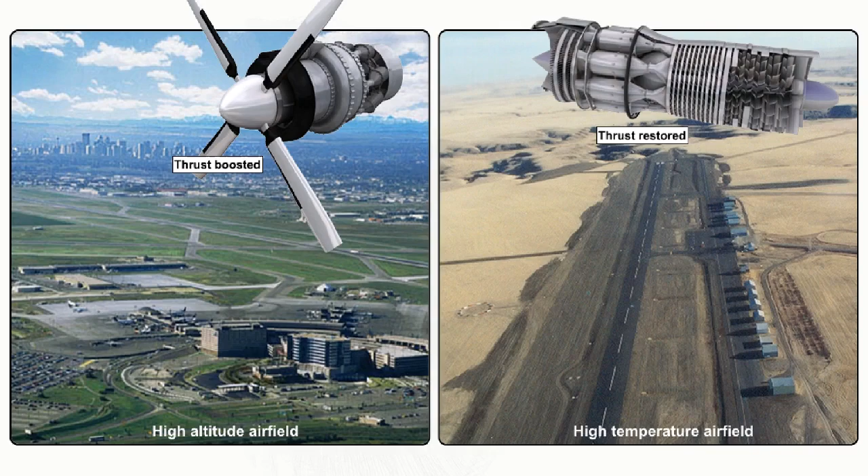In conditions of high altitude and/or high ambient temperature, the use of a water injection system can restore the thrust of a turbojet engine and boost the output of a turbopropeller engine. Typically, the water injection system is activated by moving the throttle to the takeoff position.

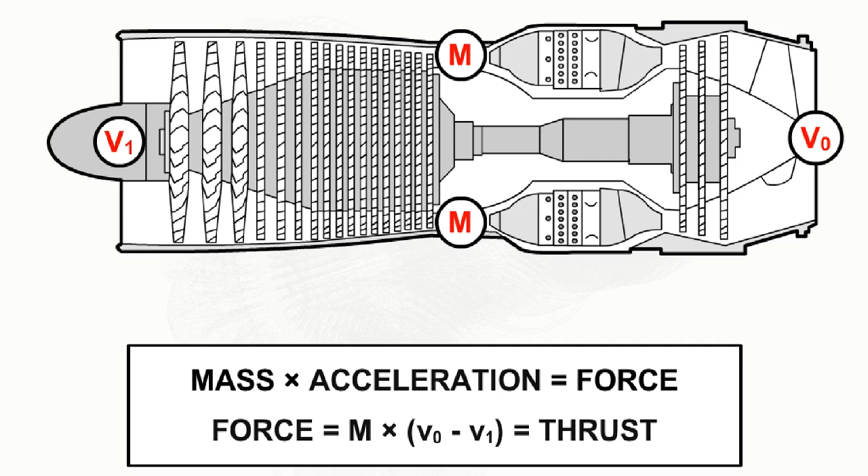We stated in the introductory lesson that the power output of a gas turbine engine depends upon the mass of air flowing through it and the acceleration imparted upon that mass of air. In conditions of high altitude and/or high ambient temperature, the density of the airflow through the engine, and therefore the mass of that airflow, decreases, causing a reduction of thrust in the case of a turbojet engine, or a reduction of shaft horsepower in the case of the turbopropeller engine.

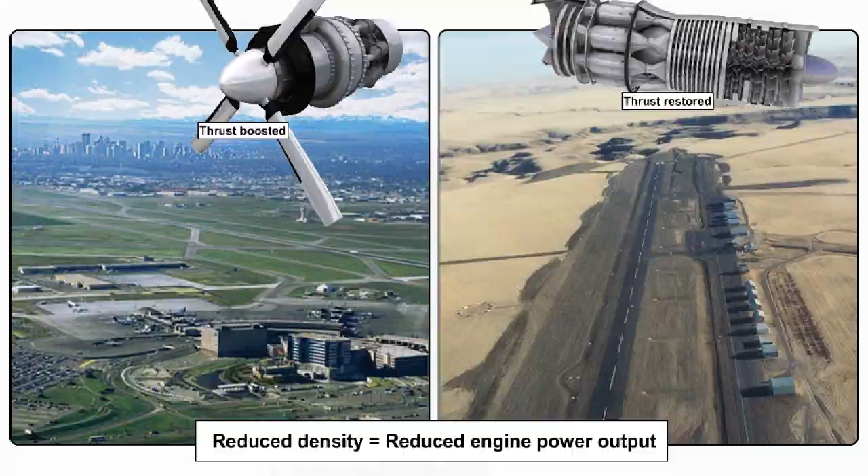To restore, or as is sometimes the case, boost the power output of an engine, the airflow passing through that engine can be cooled by spraying water into it.

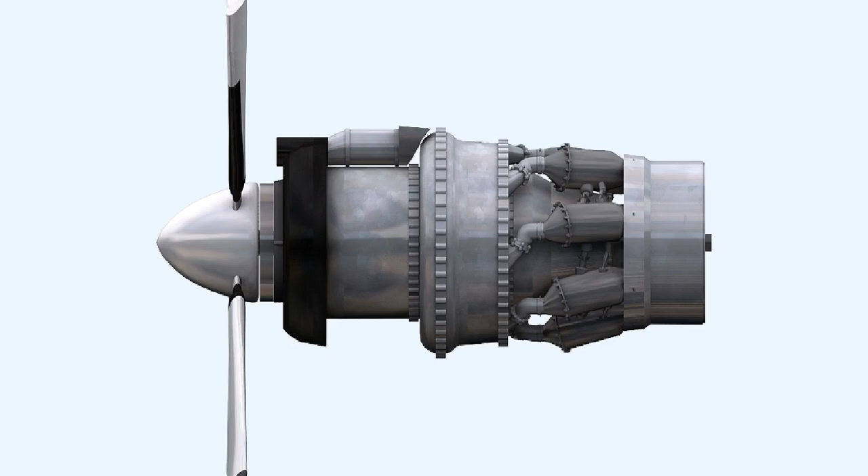The amount of water carried for use in these water injection systems can be large. The Boeing 707 and the DC-8 used to carry approximately 300 gallons of water injection fluid per engine, which all had to be used up during the 3-minute takeoff and climb. This equated to a water flow rate of 100 gallons per minute. The fuel flow through each engine at takeoff was 9,000 pounds per hour, or approximately 22 gallons per minute. This gave a water flow to fuel flow ratio of 4.5 to 1 through the engine during those periods when the water injection was being used.

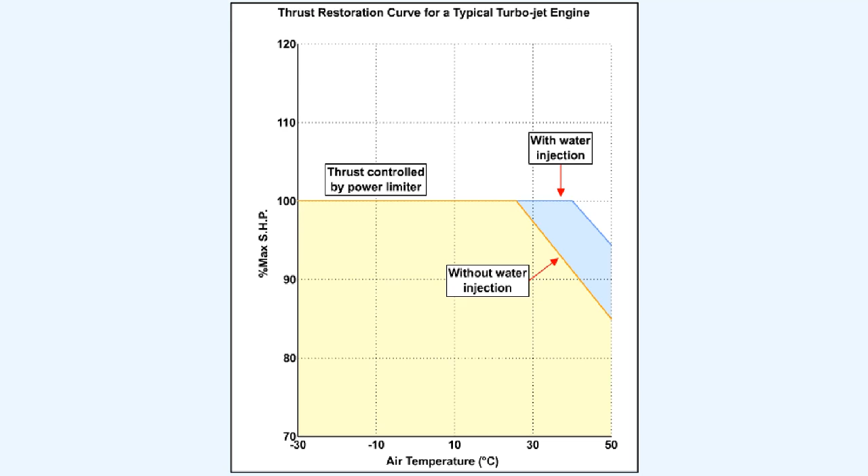Now we can see the power restoration curve for the same engine after a water injection system has been utilized to restore the power available from the engine back to the 100% level. The ability of the power restoration system is, however, limited to only perhaps 25 degrees Celsius above ISA.

The reason for limiting the thrust restoration of the turbojet engine to that of its flat-rated performance is that, although the mass of the airflow could be increased, with relatively few complications, by increasing the compressor speed, the maximum compressor outlet pressure has to be limited to prevent the engine compressor casing splitting under the excessive pressures that would be generated by using such a procedure.

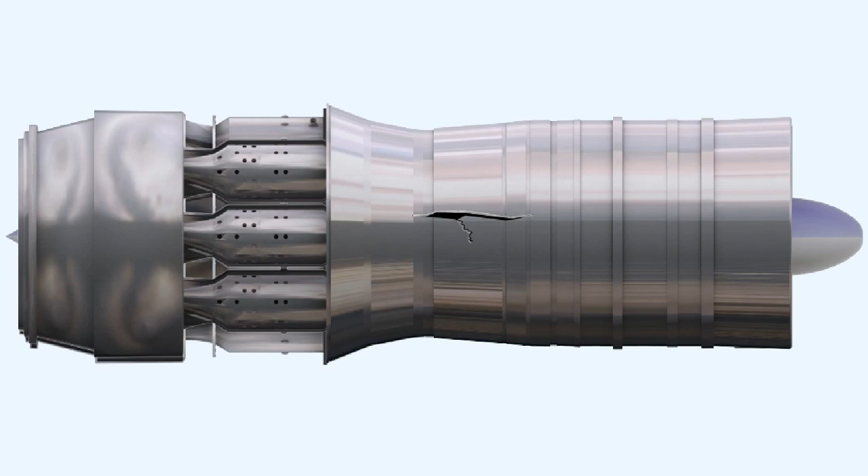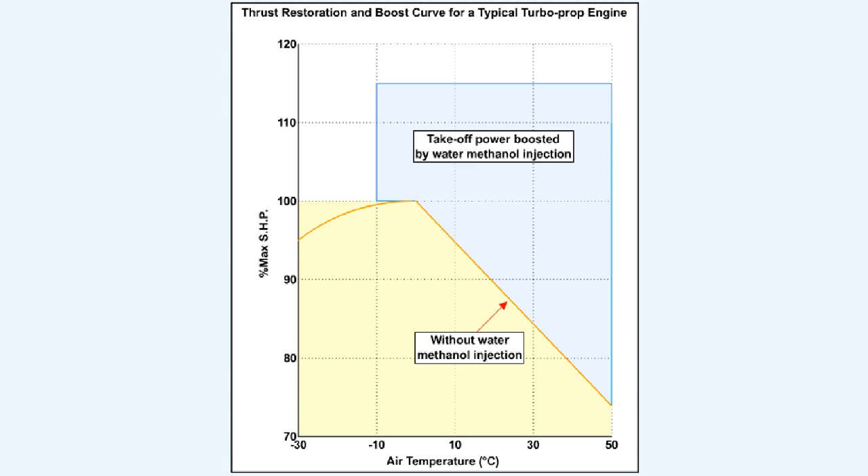This diagram shows the power curve of a typical early design turbopropeller engine without a power augmentation system operating. Now the power output of the same engine has been boosted by 15% by a power augmentation system. Note that in this particular instance the power augmentation uses water methanol as opposed to pure water. More on this fluid later.

In the case of a turbopropeller engine, if the water is injected into the combustion chamber, which is by far the most popular method of water injection, the mass flow through the turbine is increased relative to that flowing through the compressor. In the turbopropeller engine, this increase in the mass flow through the turbine is not used to increase the compressor RPM, and thereby increase compressor output pressure. Instead, the increase in mass flow through the turbine is absorbed by coarsening the pitch of the propeller to increase the mass of air being thrust rearwards, while maintaining the engine rotational speed at no more than the normal maximum.

This procedure very effectively increases the shaft horsepower output of the engine.

Some centrifugal compressor engines, and also some small American-designed axial flow compressor engines, used a system of injecting the water into the engine intake. Unfortunately, the water distribution was not of the best, and also the quantity of water injected had to be limited, so as not to cause an engine flameout.

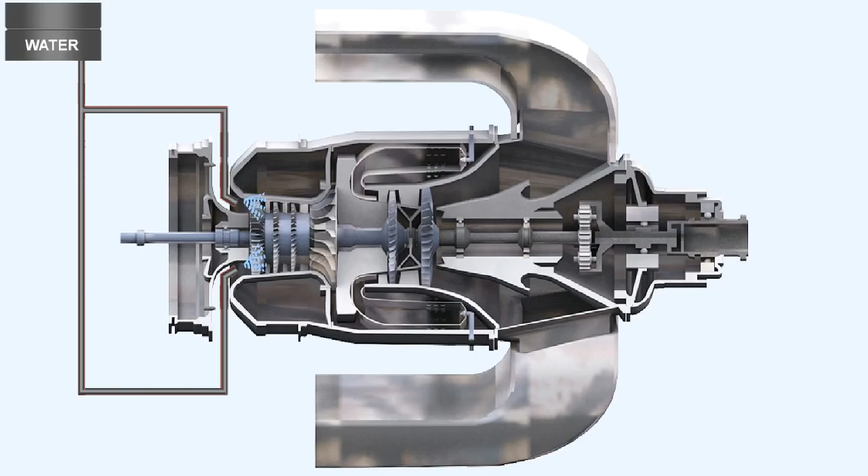As we stated earlier, injection of water into the combustion chamber increases the mass flow through the turbine relative to that through the compressor. Because a comparatively lower level of energy is being extracted from the turbine, even though there is an increased mass flow through it, there is a related decrease in the amount of pressure and temperature dropped across the turbine.

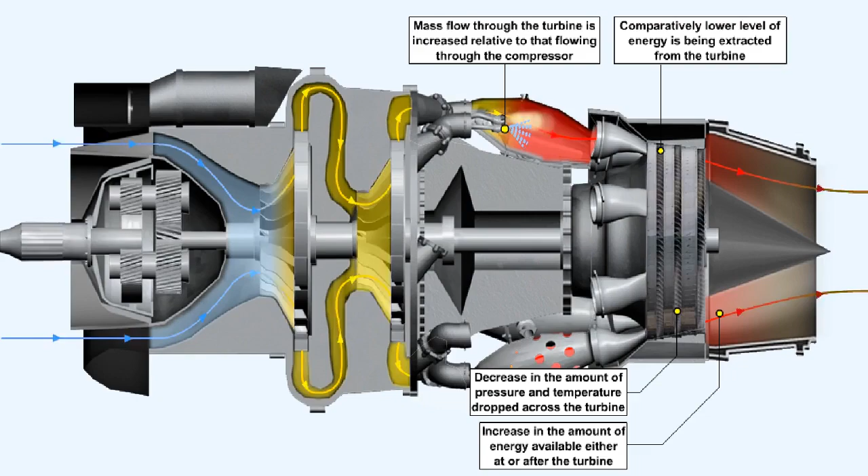This means that there is an increase in the amount of energy available either at or after the turbine. This can be used to generate extra thrust, either by driving the propeller at a coarser pitch, in the case of a turbopropeller engine, or, in the case of a turbojet engine, by increasing the pressure at the propelling nozzle.

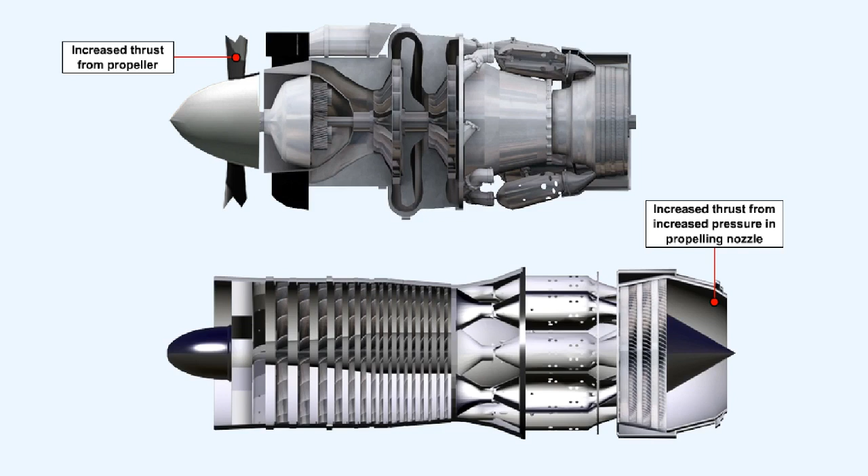A pure water injection system does have some drawbacks, not least because the water must all be used up on takeoff, if it is not to freeze in the tanks as the aircraft climbs to altitude.

It's logical to require an injection fluid that does not freeze. Thus, methanol is added to the water. The methanol serves primarily as an antifreeze.

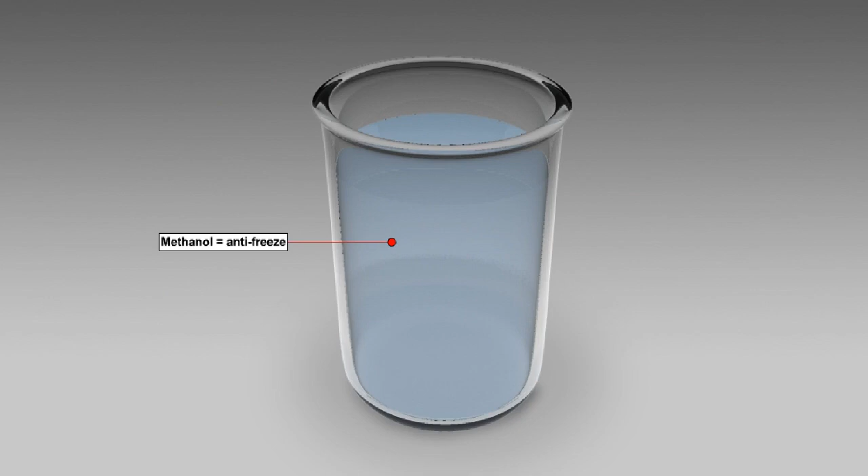By injecting coolant into the combustion chamber, the turbine gas temperature is lowered dramatically. However, if nothing was done to counter this fact, it would lower the amount of power potentially available, because the turbojet is a heat engine, which relies on there being a large temperature drop across its turbine.

The bonus obtained by using methanol is that, because it is an alcohol fuel, it burns, and thus adds to the temperature of the gases, raising the turbine gas temperature back to its original level.

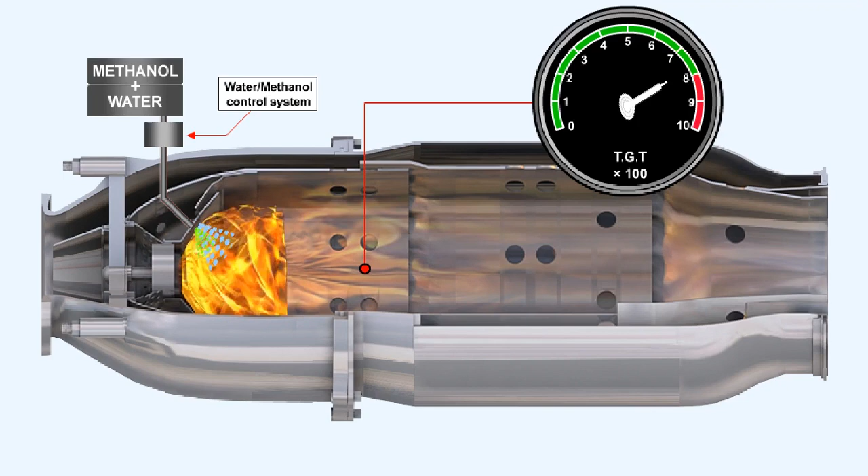In order to regulate the amount of heat added, the quantity of water methanol injected into the engine must be carefully regulated. This is accomplished by a water methanol control system.

The proportion of methanol added to the water must also be carefully controlled. A ratio of 40% methanol to 60% water by volume ensures that the turbine gas temperature limits should never be exceeded during use of the water methanol system.

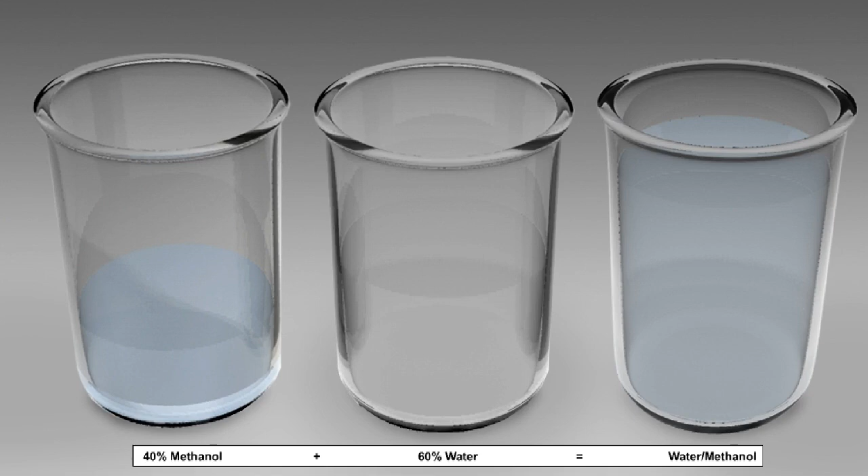Thrust augmentation by afterburning, or as it's sometimes called reheat, makes use of the unburnt oxygen which remains in the engine exhaust gases to release more heat energy.

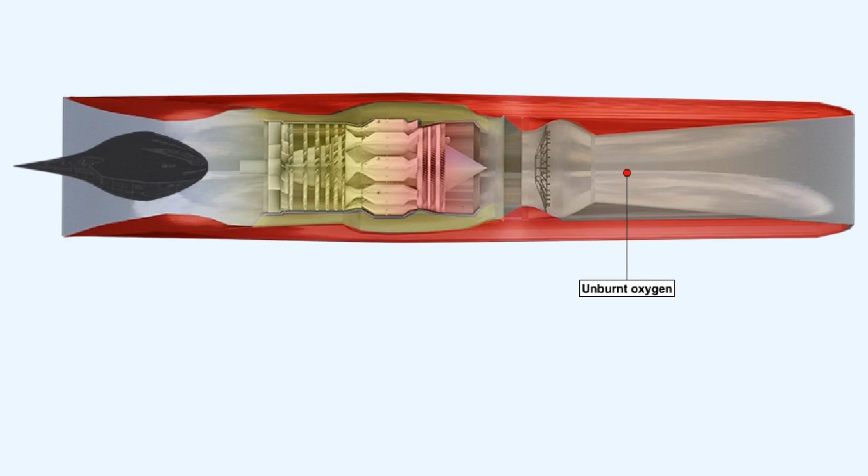This is achieved by injecting fuel somewhere between the turbine and the propelling nozzle and burning it. Afterburning is used to improve takeoff, climb and combat performance. Its use is mainly restricted to military aircraft.

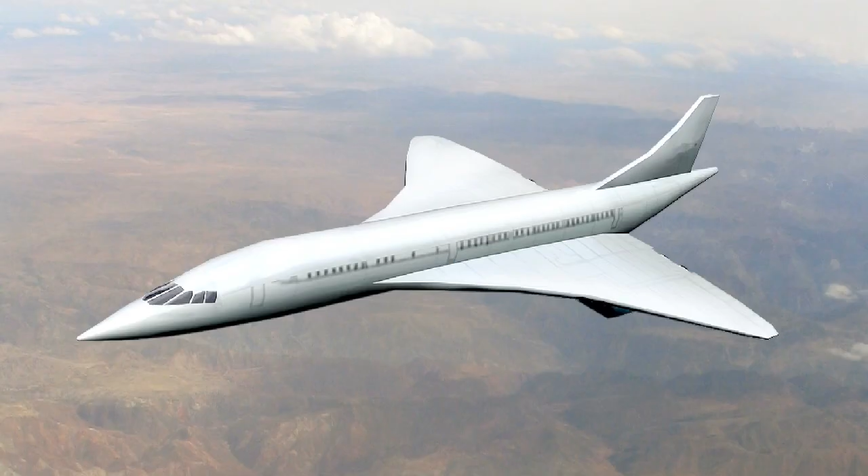Fuel is introduced into the jet pipe through discharge nozzles centrally disposed around the axis of flow. This enables some of the relatively cooler turbine discharge gas to flow along the jet pipe walls, which aids in cooling the jet pipe. This is required because the afterburner flame temperature may be in excess of 1700 degrees Celsius.

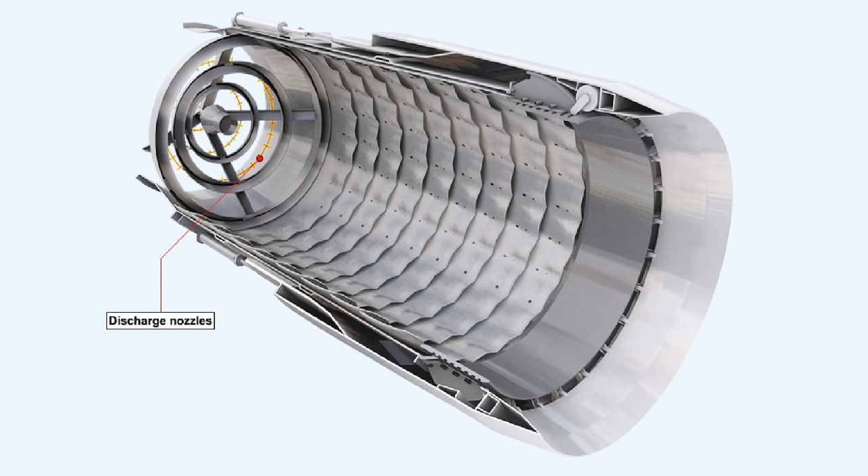An afterburning jet pipe is fitted with a variable area propelling nozzle. The area of the propelling nozzle is restricted during non-afterburning operation, and it's opened fully to allow for the increased volume of gas which is produced during afterburning operation.

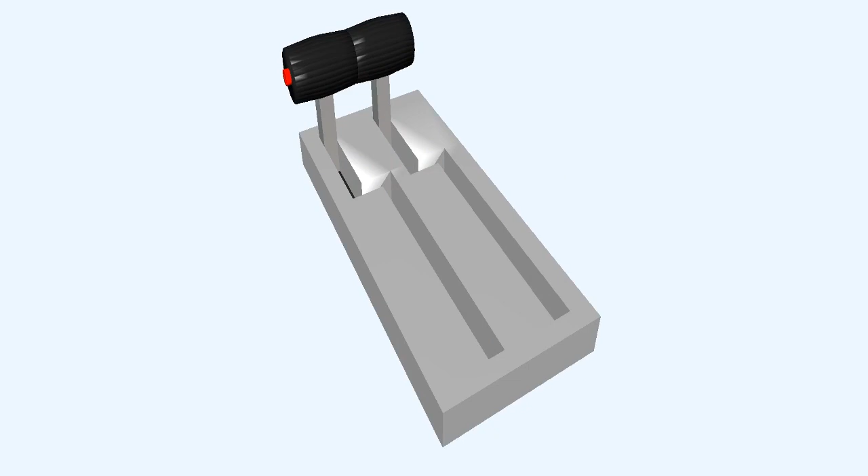The selection of afterburner is usually initiated by the pilot moving the throttle lever through a detent or gate. Control of the nozzle is automatic.

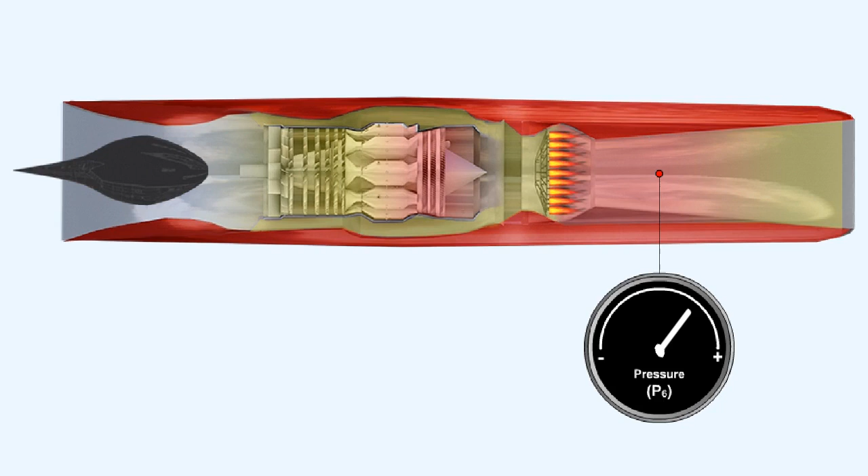When the fuel from the afterburner is ignited, the pressure in the jet pipe, which is called P6 pressure, will increase. This causes a change in the pressure ratio across the turbine.

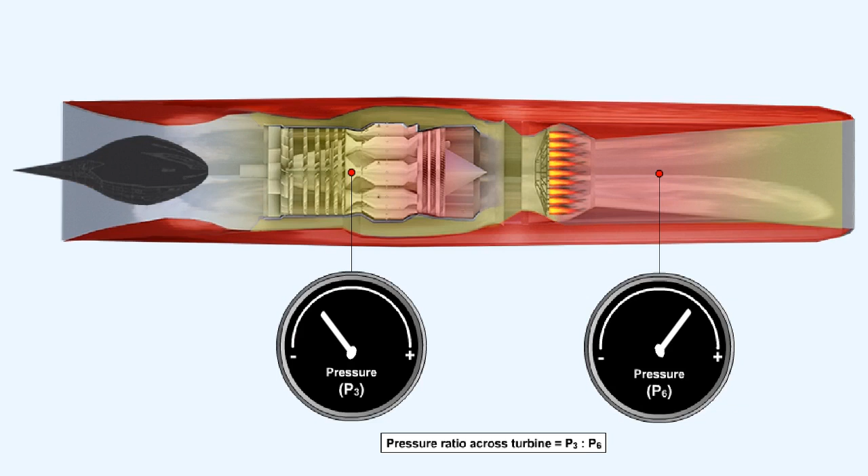The pressure before the turbine is commonly called P3 pressure, so the pressure ratio across the turbine is P3 to P6. The variable area propelling nozzle is automatically opened so as to restore the correct P3-P6 ratio.

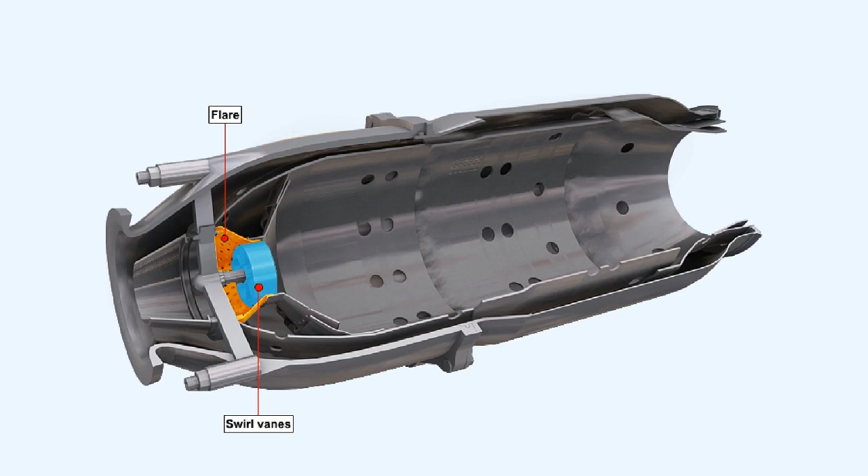In the combustion chambers lesson, we stated that because the flame rate of kerosene is only approximately 30 feet per second, to prevent the flame in the chamber being extinguished immediately, we had to slow down the speed of the air entering the combustion chamber. In the combustion chamber we used components called the flare and swirl vanes to effect that reduction in velocity.

Because of this low flame rate, we must also reduce the velocity of the gas stream through the afterburner, in order that the afterburner flame can remain stable. This is achieved by a diffuser, which is positioned before the afterburner section.

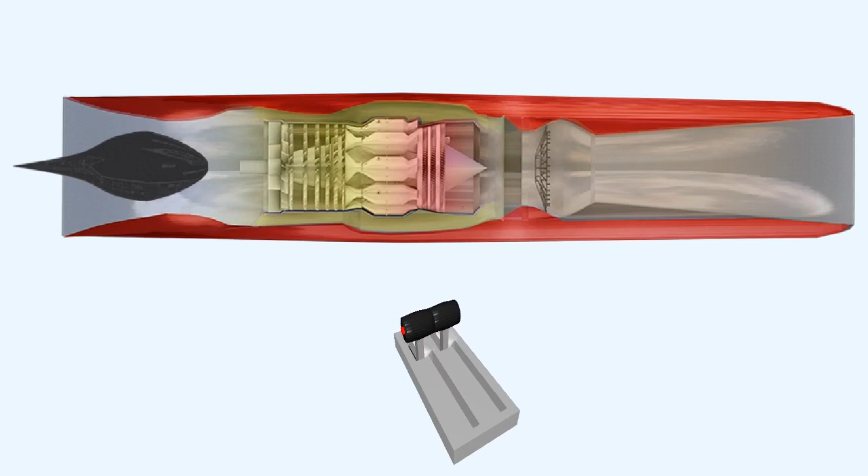When the afterburner is selected, an atomized fuel spray is introduced into the jet pipe through the burners. The atomized fuel spray is ignited by either an electric or catalytic igniter plug, or, in some systems, hot shot ignition.

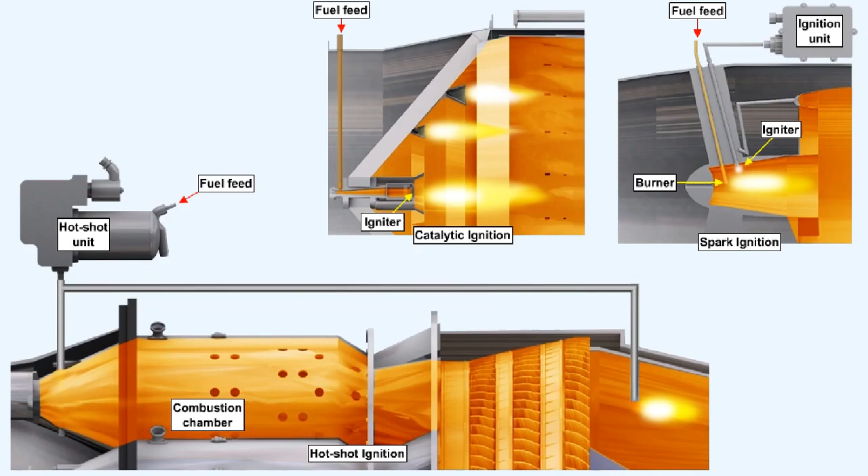Once combustion is established, the gas temperature increases appreciably. The increase in thrust obtained due to the use of an afterburner depends entirely upon the ratio of the absolute jet pipe temperatures before and after the extra fuel is burnt.

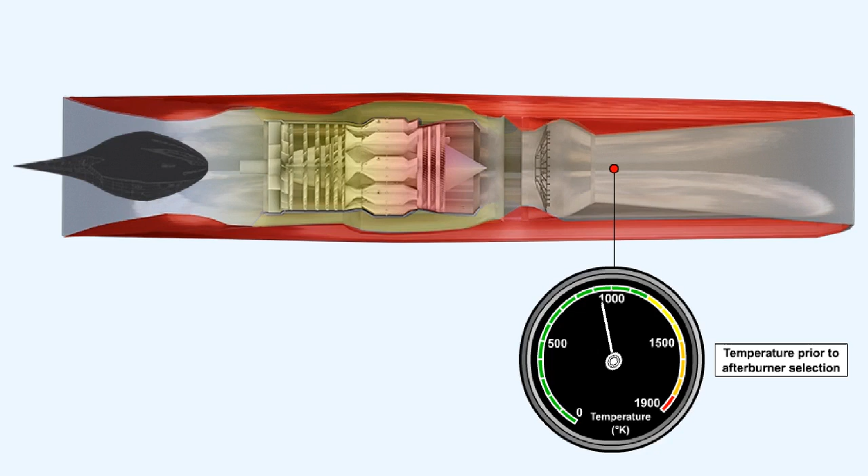If, for instance, we assume a gas stream temperature of 900 degrees Kelvin prior to selection of afterburner, and the temperature of the gas stream rises to 1500 degrees Kelvin subsequent to its selection, then the temperature ratio is obtained by dividing 1500 by 900. This gives us a temperature ratio of 1.666.

The velocity of the gas stream in the jet pipe increases as the square root of the temperature ratio. In our case, that is the square root of 1.666, or 1.29. This means that the gas stream velocity will have increased by 29%, and thus the increase in static thrust will also be 29%.

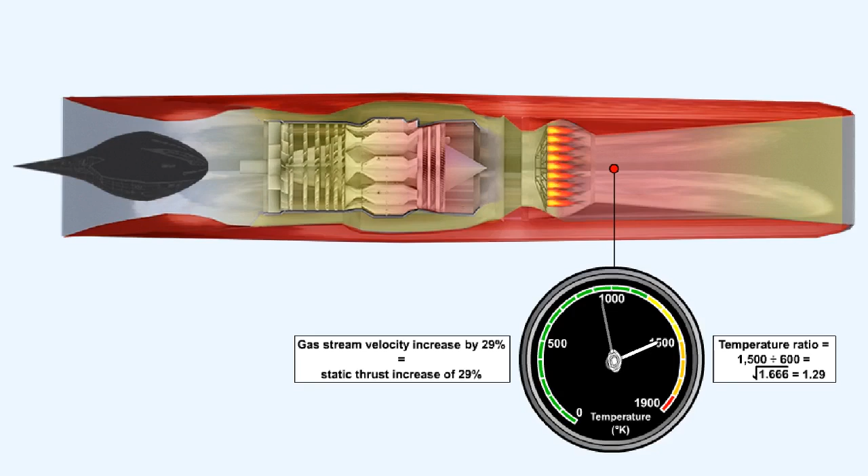As can be imagined, the fuel consumption goes up dramatically when the afterburner is selected, so its use is normally limited to short periods only. This concludes the lesson on thrust augmentation.